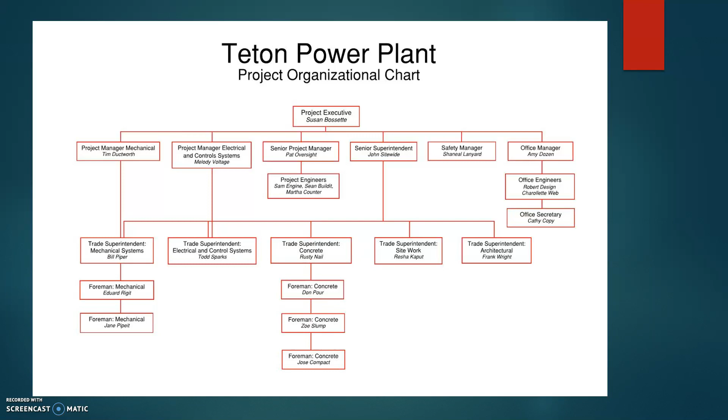This site of the Teton Power Plant is located in a rural area, and it's going to have two boilers that produce over 380,000 pounds of steam per hour with a single turbine generator.

There will be 10,000 cubic yards of concrete, 15,000 feet of above ground large bore pipe, 43,000 feet of above ground small bore pipe, and over 700,000 feet of wire and cable. There's a large field to the north that a farmer is willing to lease at a very high rate.

But we believe that we can stay away from the property line, stay away from this field, and save money.

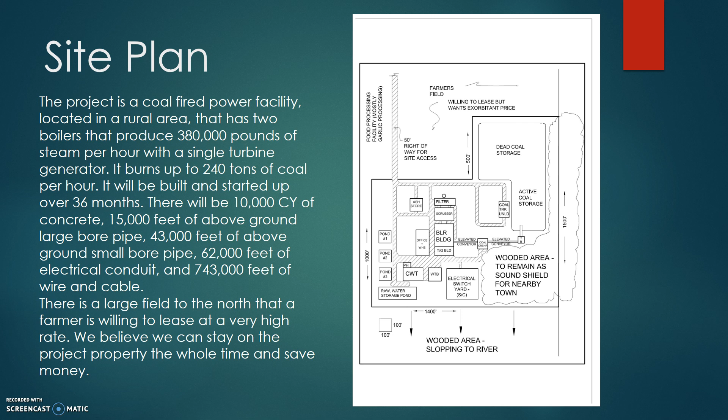Now we have broken up our proposal into three phases of the process. Phase 1 will deal from months 1 to 11, Phase 2, 12 through 17, and Phase 3 will finish up from month 18 to 36.

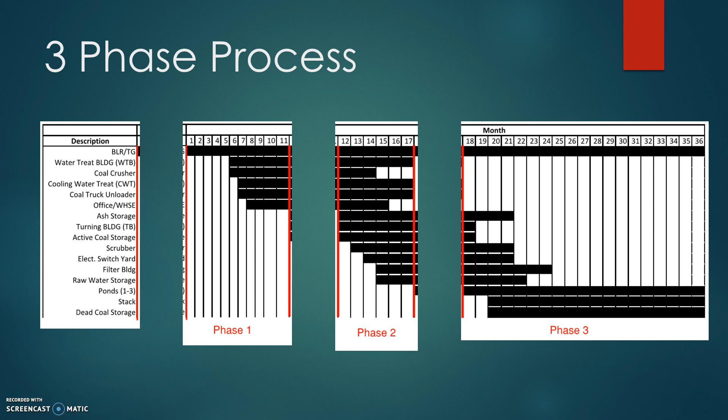This will help us to be able to better plan out the location of the components of the building site.

When looking at the manpower loading, we can see that it'll be right in the middle of the 36 month time period that we have the most men on site. If you look at the chart, right in the middle, it is rising at a higher rate, which means there are more hours being used at that time.

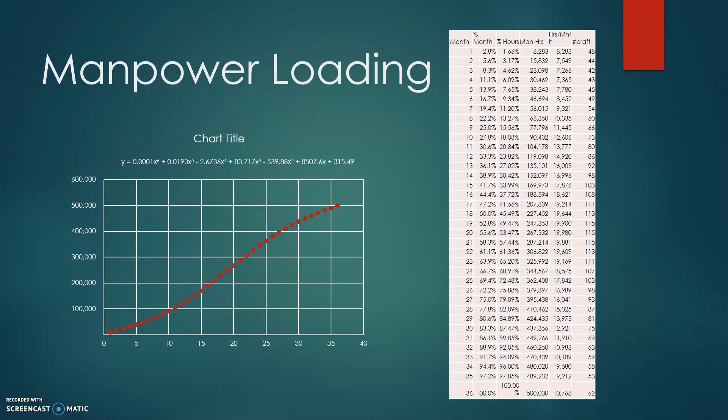In going over the details, we have proposals for how we're going to deal with the compressed gases and air for the construction, what we'll do with SWPP, and how to keep the dust down in the project.

For temporary power, we'll have power stations that will be made available throughout the project, no greater than 200 feet apart on either side of the road.

For waste removal, we'll have mobile dumpsters that will be brought in and out, and that will be able to be called in and taken out to a landfill.

For mud and debris prevention, we plan a mound of relocated dirt from the project on the western, southern, and eastern sides of the project to prevent debris and mud from getting into the main roads.

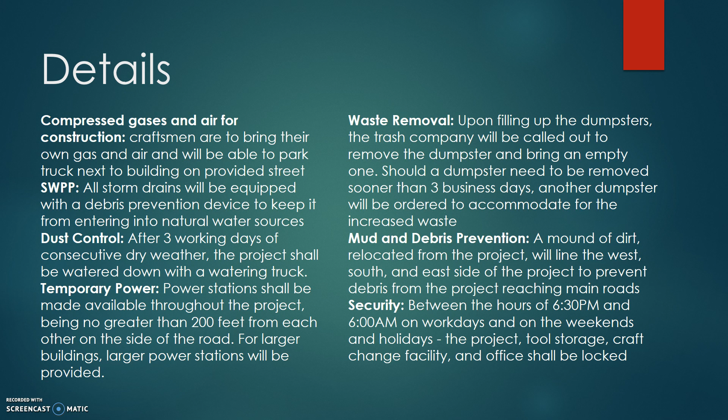As far as security goes, we will lock up the project from the hours of 6:30 p.m. to 6 a.m. on weekdays during normal work days, and then on the weekends and holidays as well.

Phase 1, as we said, deals from months 1 through 11, and we will be building the boiler, the water treatment building, the coal crusher, the coal truck unloader, and the office warehouse.

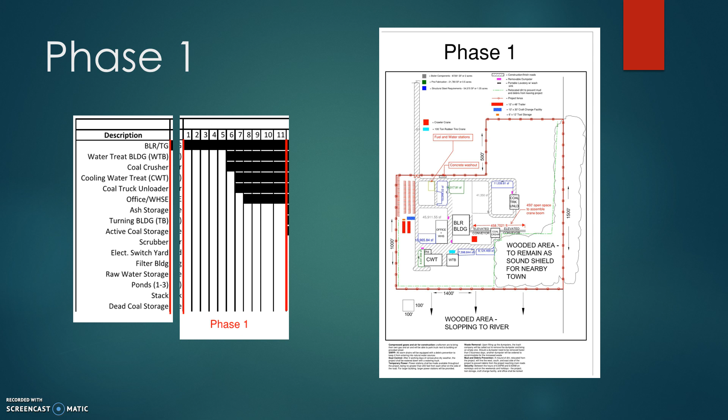Something that we would like to highlight with Phase 1 is that we are planning on putting a parking lot on the west side of the project.

We believe that this will be the best location for us, as it will be right next to the gate, right next to roads, and in a location that isn't affected by buildings at the end, so we will not have to redirect the flow of traffic to another spot as we start to build there.

We're also putting the office trailers just to the south of it, along with tool storage and the craft change facility, so that the workers who come to work every day will not have to walk far to get ready for work.

Also, a critical component of this project layout is that we will be using a crawler crane, and its boom will be 450 feet in length.

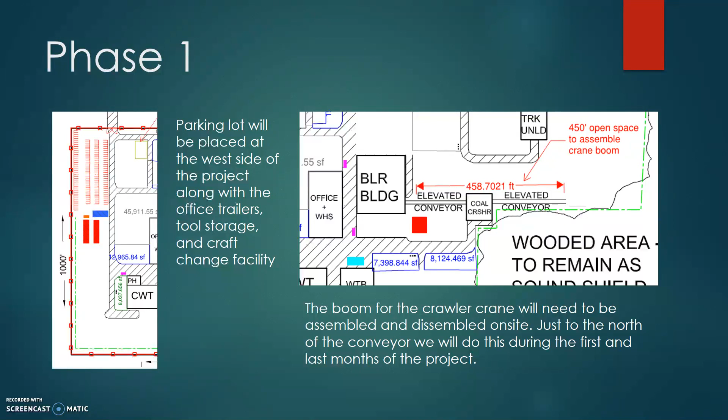To do this, it needs to be assembled on the ground, so we have an area just north of the coal crusher where we plan to assemble and also disassemble the boom at the end of the project.

Looking at the material placing, where we'll be placing materials as they come into the project, we have planned 2 acres for the boiler components, and half an acre for prefabrication, scattered throughout the project so that it will be closer to the actual buildings they're being used to build.

Also, structural steel requirements, as all these buildings will be made out of structural steel, will have about 1.25 acres worth.

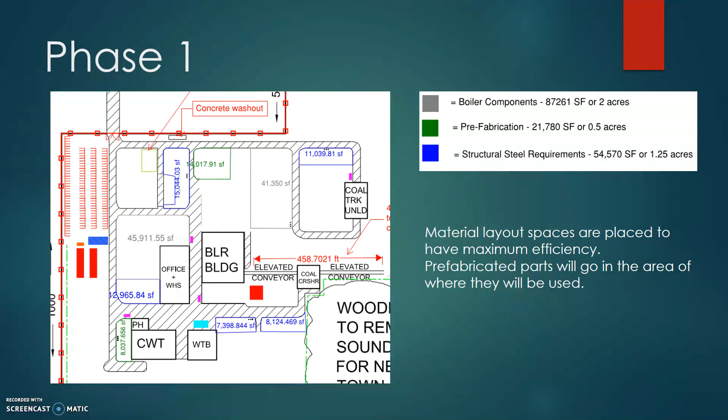Moving on to Phase 2, between the 12th and 17th months, we'll start the ash storage, the turning building, active coal storage, scrubber, electric switchyard, filter building, and the raw storage.

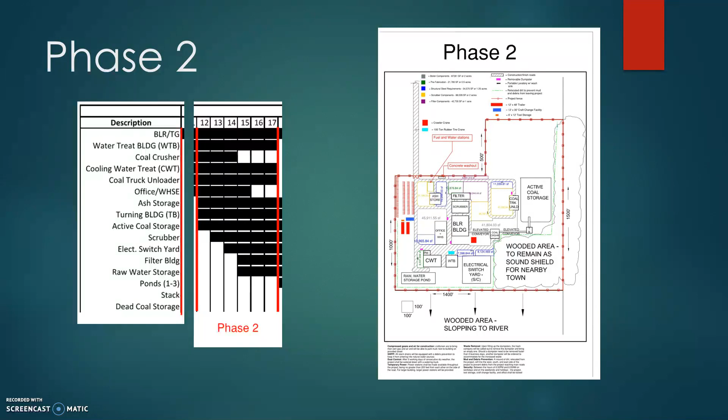As you can see, those are now on the plan, and we will continue with the previous amounts of acreage for material supplies, and the scrubber components will be added in.

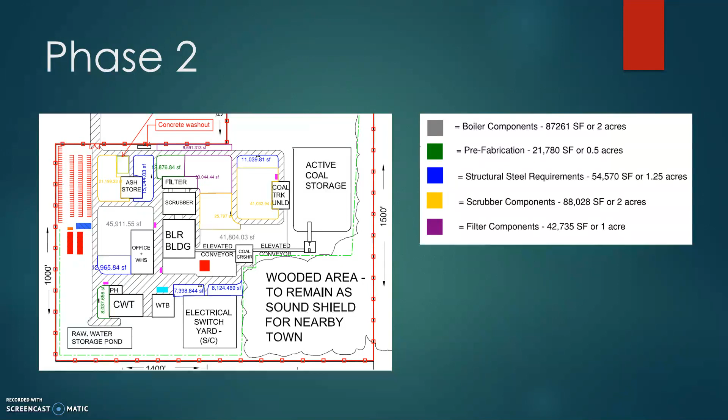These will be added right around the scrubber. Also, the filter components will be added in, so that we won't have to travel far, or much at all, to get it to the location of the actual building.

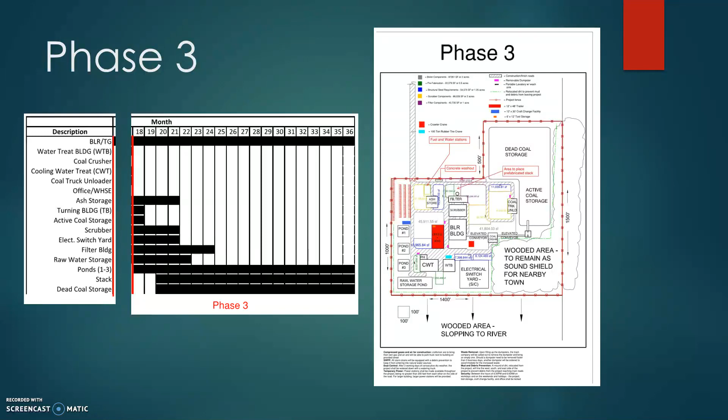In Phase 3, the last 18 months of the project, we will be finishing up the ash storage building, the active coal storage, the scrubber, electric switchyard, filter building, raw storage, and we'll start on ponds 1, 2, and 3, the stack, and the dead coal storage.

Also, when we finish the office building in the middle of the project, we will return the rental trailers to the company, and we will move into the office.

That way, we can begin work on the ponds, and we won't have to try and find a different spot for the office for the management staff to work out of.

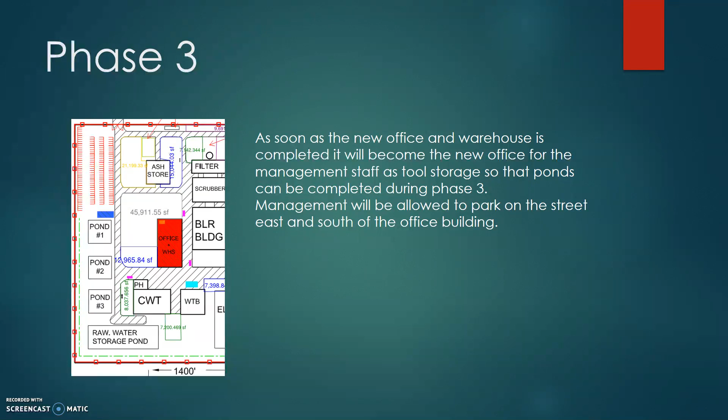We also plan to rearrange a little bit of the prefabrication. As you can see on the north side of the project, we reduced the size of the area right above the filter so that we can have that area to place the prefabricated stack.

And we made a new area for the prefabrication components down in the south, between the cooling water treatment and the other building just to the west of it.

We believe that as we move forward with this project layout, we will find the most effectiveness in building these buildings, and the work will flow smoothly. The material will come easily, and we'll be able to build these buildings without much difficulty.